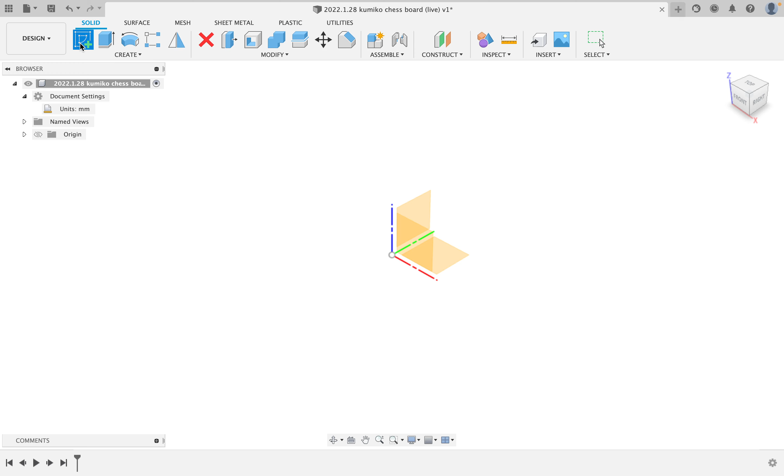So we're going to start by modeling. When it comes to something like a chessboard, it doesn't matter if you're modeling from the side or modeling from the top, but if you want to turn it into an actual cabinet at some point in time, it's probably best to model from the top because that's where you're going to be seeing the thing. So we're going to start by drawing a center point rectangle, and because a chessboard is square, we're going to make the two sides equal, and it is a center point square.

Now, we don't need to worry about how big this rectangle is. We're just going to draw another one for our dividing lines. Now you're going to think that we might need a horizontal one and a vertical one, and then we'll make them the same and all that. It's actually a little simpler than that. We're just going to click on our dimension tool here. Dimension this to be 2 millimeters. We're modeling in millimeters today.

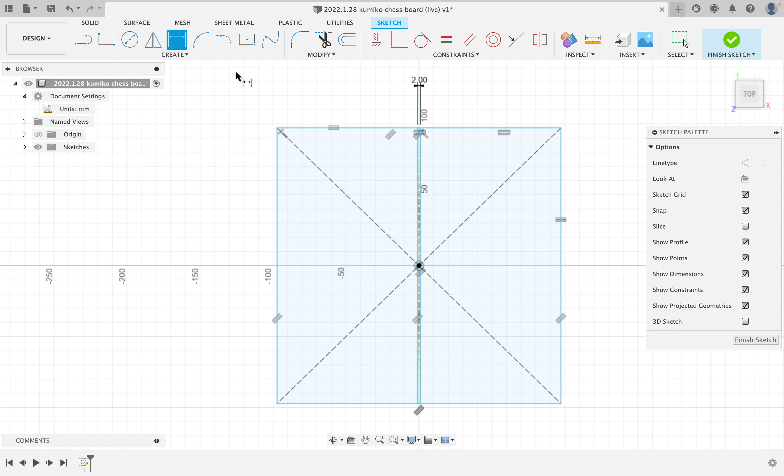I apologize to our American friends, but most of these we've done in inches, and Kumiko is a Japanese traditional art form, to a certain extent. Japan is a metric country and has been for a very long time, 100 years or so, give or take. And before that, it wasn't an imperial measurement system. It was a different traditional system, which Fusion 360 probably does not like very much. Not to mention, I don't think anybody in Japan is likely to be measuring these pieces in the traditional measuring system because it is a little awkward.

So we have this 2 millimeter piece here. What I am going to do with that 2 millimeter piece is I am going to flip it mirrored. So I will pick our 4 sides by double clicking on it. I will say that I want to mirror it across this 45-degree dividing line that comes with the center point rectangle. And I will say OK. And now we have a horizontal and vertical piece, and each of those is exactly the same.

Now, I want to take these two outside lines and create a rectangular pattern. We're going to move it left and right. We will make it symmetrical, and we're going to say that there are 82 millimeters between each of them. We want there to be a quantity of 9 because we need 8 spaces, and hit OK. Now I'm going to do the same thing, say repeat rectangular pattern. Don't need to worry about the fact that it's gone outside our grid. We are going to modify our grid in a second.

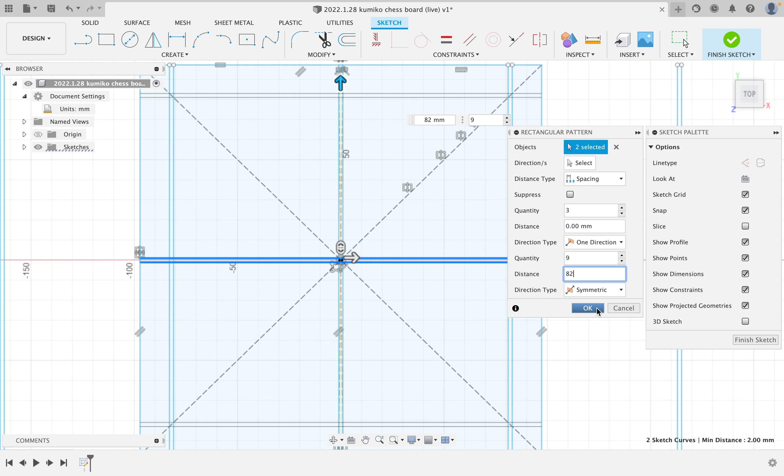Now I will select those 2 lines. I will move them up. We will change this to be 9 of them. They are going to be symmetrical, and again, they will be 82 millimeters apart. You can make that a variable and set that, but it doesn't really matter.

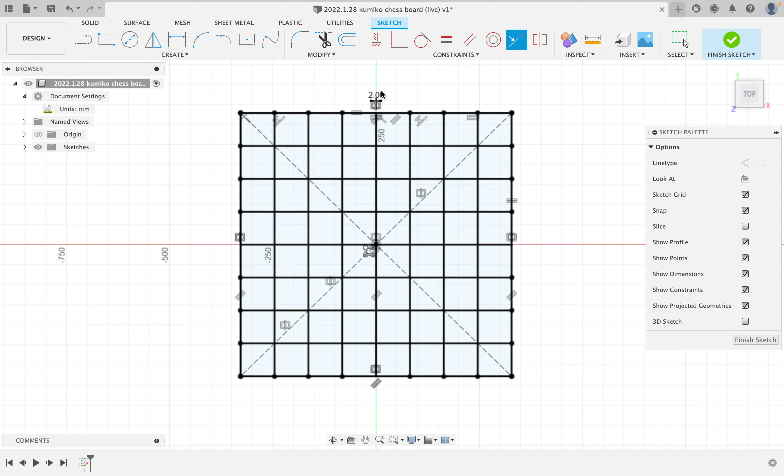And now the only thing that we want to do is we want to say that the outside line of our outermost piece is the same as the outside line of our square. And now you can see we have an 8 by 8 grid, and that will work out just fine. That's it. That's all we need, we give 1 dimension here and say finish sketch.

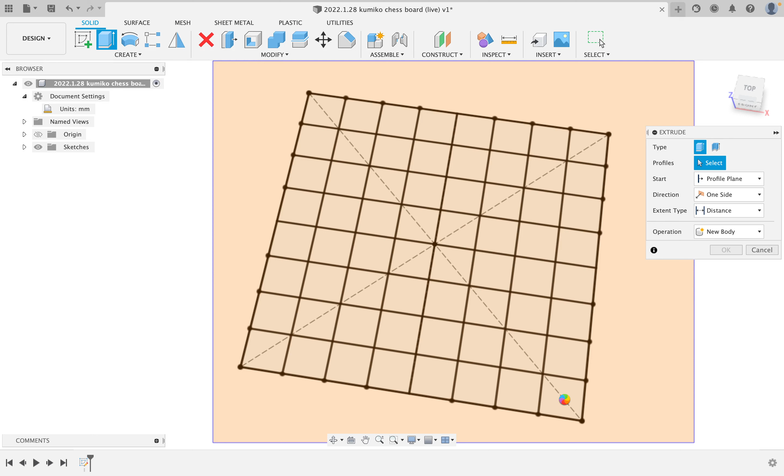All right, now we're going to take that and we're going to extrude it. You can hit E or click on this, you can hit extrude. I'm going to select the whole thing. There is, unfortunately, no easy way to select all the lines, but not all the squares. I wish there was. But it will only take me a minute to go in and do this.

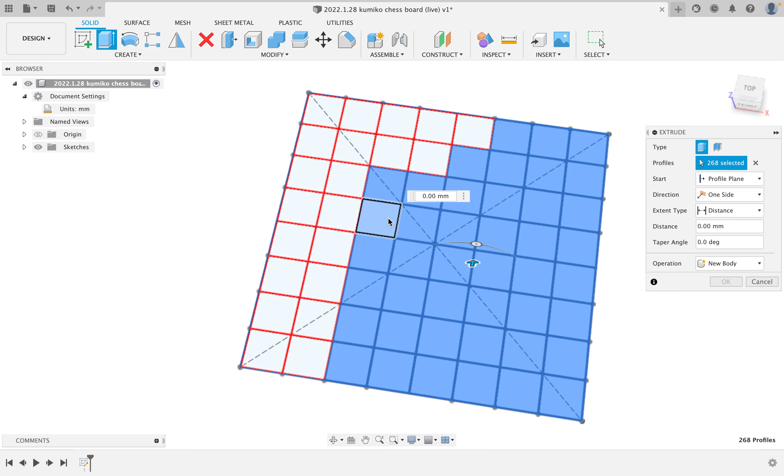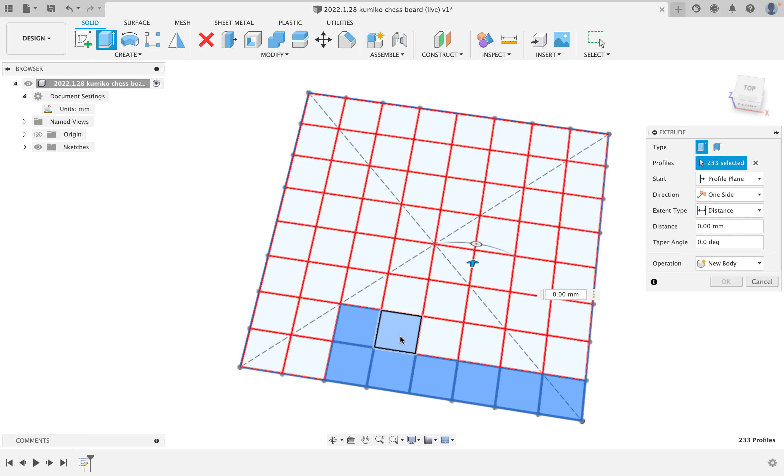Now, I could actually know the dimension on all these squares beforehand. And I could go through and make only one dividing line, copy the dividing line across the mirror face the way that I did in the sketch, and I wouldn't have to go through this particular step. The reason I choose to do it this way rather than modeling one piece and mirroring and copying that is that if I do that, I will have to go back and forth in time or know the dimension in advance. Practically speaking, you probably will know the dimension, but that isn't necessarily the case.

What I really want it to be based on is the dimension of these individual squares, that they're going to be 82 millimeters separated. If I want it to be based on that, and I don't want to have to do all the complex math that comes along with it, I can do this, and as you can see, it took me about 30 seconds.

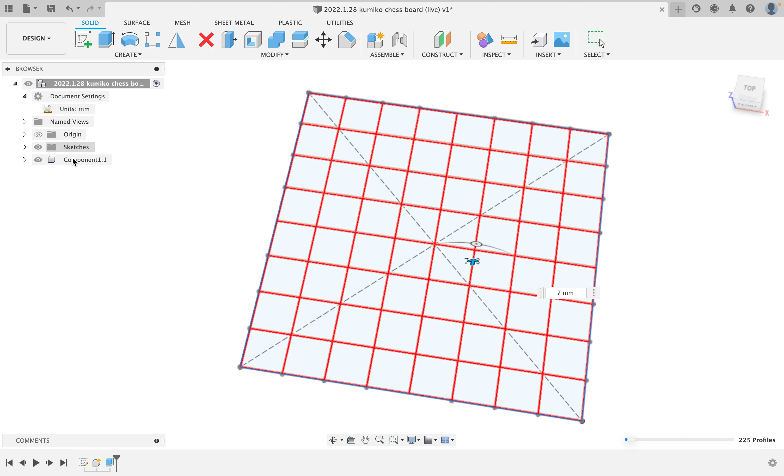So I'm going to make this 7 millimeters thick and say a new component. We're going to go over here and, double-clicking, we're going to call this new component grid.

My computer's being a bit slow today. It just did an update, and I don't think it likes it very much.

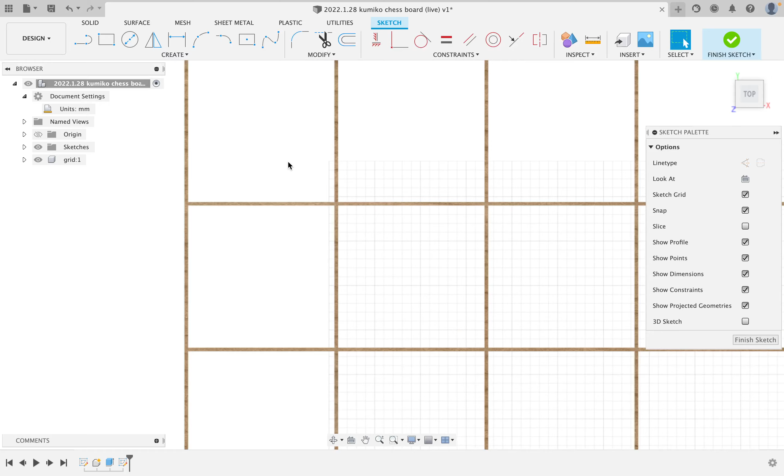So we have our grid. Now what I'm going to do is I'm going to create right away another sketch on that same plane. I'm going to go in here and I'm going to hit P for project. So I'm going to copy the dimensions. I will select our grid, and now I have all the individual intersection points from the grid, and that is great.

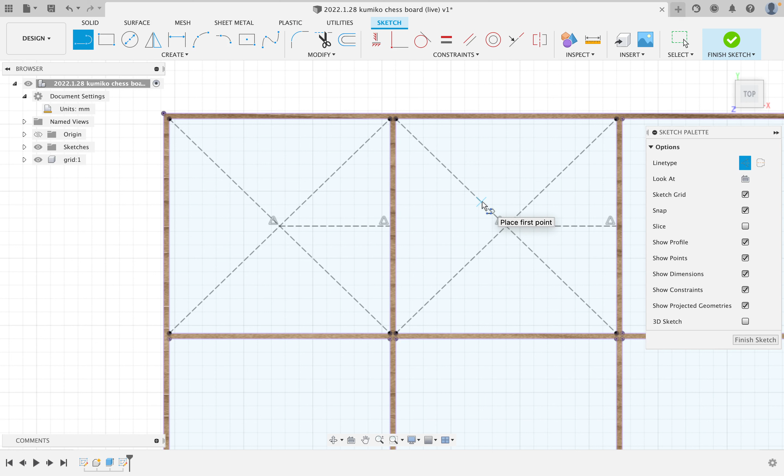So I will go to our line tool, hit X to make it a guide rather than a real line, and I will draw corner to corner and center to edge. So we have a nice center point, and we have mirrored dividing lines. And I'll do that in these top two squares. I won't do it for all the squares, because what I'm going to do is I'm going to create two Kumiko patterns. One for our dark squares and one for our light squares. They're not actually going to be light and dark in this model, but that's what we're going to be doing.

Now, I'm going to say I want a curve, and my curve is going to go from this line to this line. Seems all right. I'm going to make that curve there. Now you can see it's going right to the center of this piece here, and I'm going to give it a dimension. It is going to be 21 millimeters from that edge.

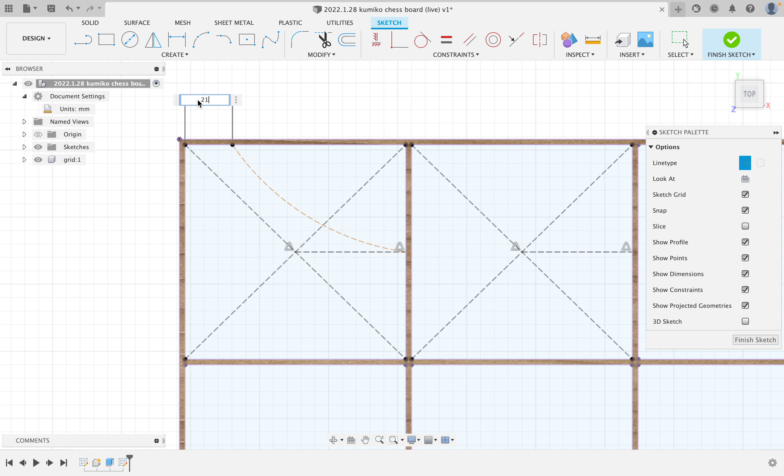The other thing I'm going to do is I'm going to give the curve itself a radius, and I will say it's 65 millimeters radius. Now keep that 65 in mind. It's not 65 degrees, it's that it is a 65 millimeter radius circle.

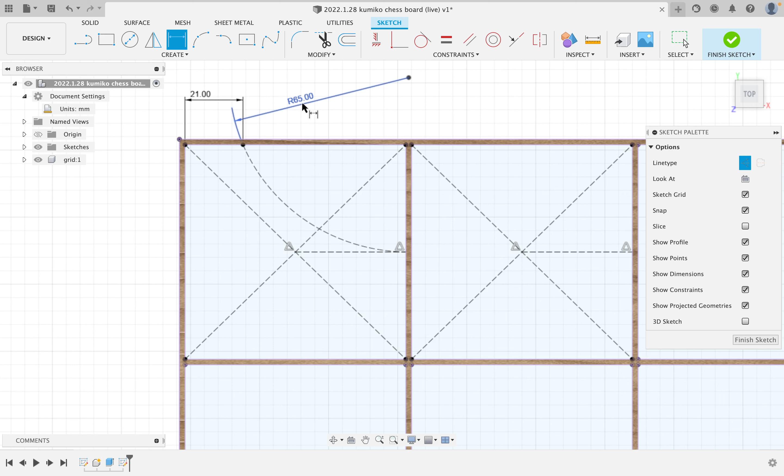The reason I want you to keep that in mind is because we're going to use that in both here, so we only have to be able to make pieces with one radius, and that will save quite a bit of time in construction. In the modeling, it doesn't really make any difference. I can just type in a new number. But if you're going to actually make a jig to make these round pieces, having them exactly the same radius will save you a lot of time in making them.

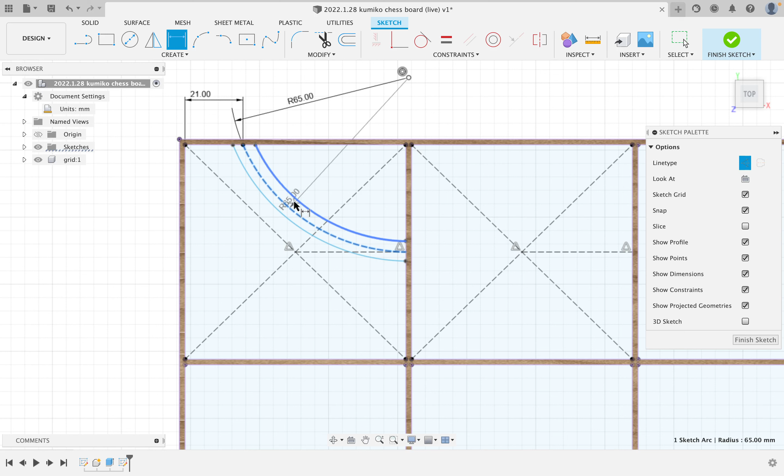Now, because Kumiko actually has a thickness, I'm going to draw two more curves. One curve and two curves. That curve, where it is, doesn't matter, and I will select both of them, hit X, and toggle them back to be regular. I will make them concentric by using our concentric constraint here. I'm going to take one and drag it back, and one and drag it a bit closer. And now I am going to give it a dimension between these two lines of 1 millimeter.

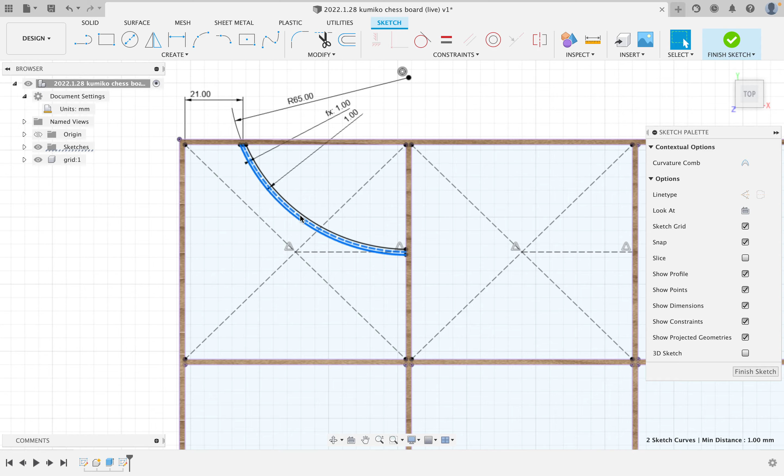I'm going to give the outside one the same dimension, but I'm just going to click on it here. Because if I click on it and I ever have to change one, I just change the first one. And we're going to be using this 1 millimeter dimension all the way through because all our Kumiko pieces are 2 millimeters thick. Now, I could draw that again, but what I'm really going to do is I will pick the two outside curves, 1 and 2. If you can't select something, just zoom in.

I will say circular pattern, and I will click on this center point. Now, I don't want 3 of them. That would be a neat effect, but I actually want 4 because we're going around in a square. You can scroll down or up and put that in, and that's pretty good. I think that looks like a great little pattern, but I want to make sure that it is distinctive from the other one we're going to create.

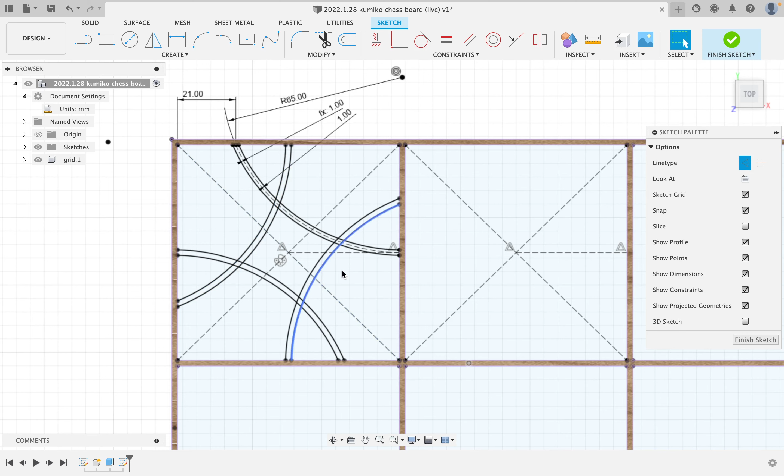The other one we're going to create has an outside set of curves and an inside set of curved squares. This one has an outside set of curved squares, and what we're going to do is we're going to make an inside circle. I will draw that. I will turn it into a regular line by hitting X, and I'm going to make it tangent to any of these. If you make it tangent to any of them, it will be tangent to all of them.

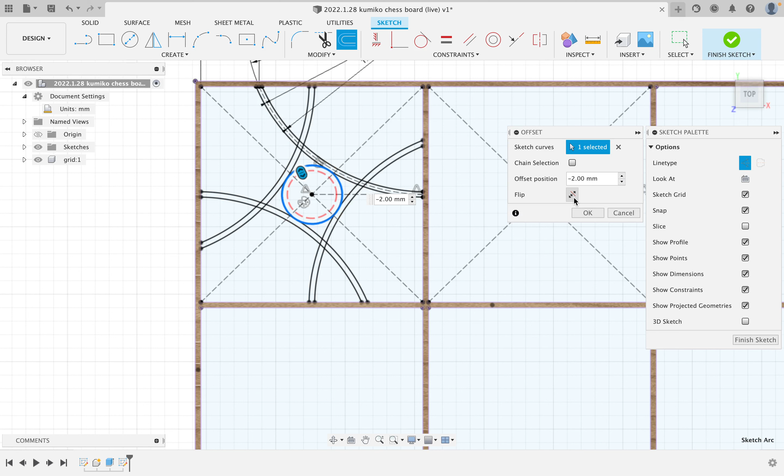I will click on it, say modify, offset, and make it 2 millimeters offset. Now you can see it's making it 2 millimeters offset to the outside. If we say flip, it will go to the inside, and again we click on it, hit X, and turn it into a real line. The reason we don't do that with these curves is that if you offset the one to the outside, it actually won't connect to the outside line, and you'll have to modify it later. So it's easier just to draw a few extra curves.

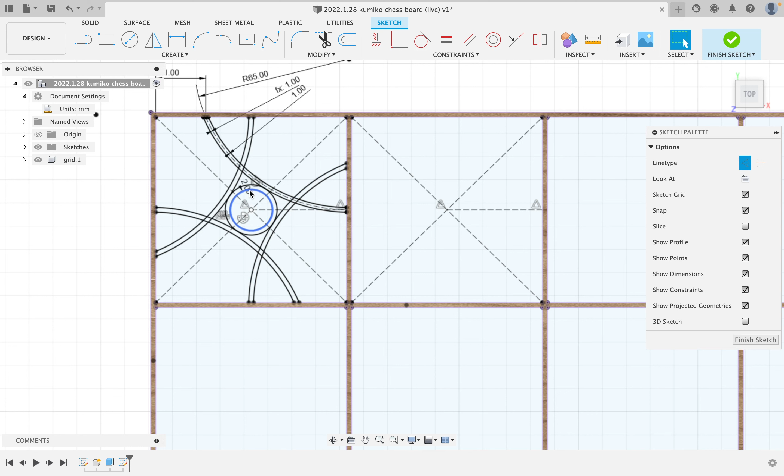All right, we're going to leave it at that. I could make this hugely more complicated, but I think that will do it for now. If you want to take that and make some more interesting lines in it, that would be fine too. I'm just going to drag this 2 millimeter number out here. You can always drag around your dimensions to make it so you can read them all, and I think that makes it a little easier to see if you ever wanted to create this again.

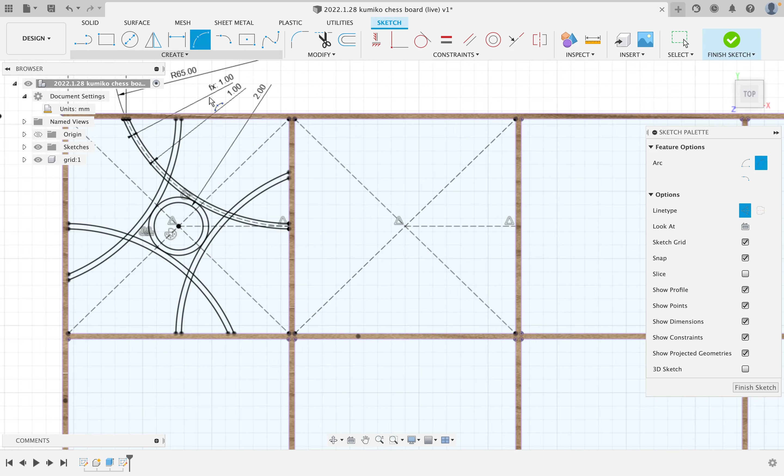We're going to go to this second one here, and we're going to start by drawing from this line out here to the center point of this edge. And we will draw that. This is again going to be a guide line. And we will hit that line, dimension, and we're going to make that dimension exactly the same as this 65 over here, and hit OK. Goes a bit out there, but we will drag it back in so we don't get confused.

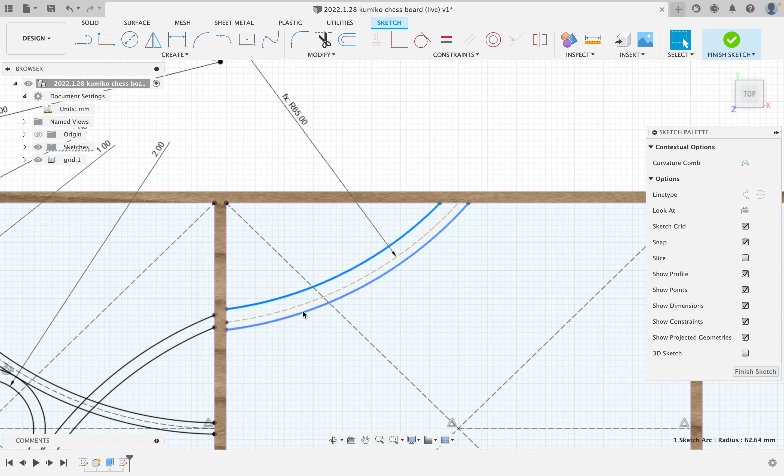And I will do exactly the same thing that we just did. I'm just going to turn off the guide drawing here. Draw from one side. Draw from the other side. And I will make those, again, concentric. One to this one, and to that one. I'll drag one of them back over here. It doesn't matter which one's inside and which one's outside because they're all concentric, which means they all follow the same curved path. Now, if I say dimension again, from the inside to the outside of that is 1 millimeter.

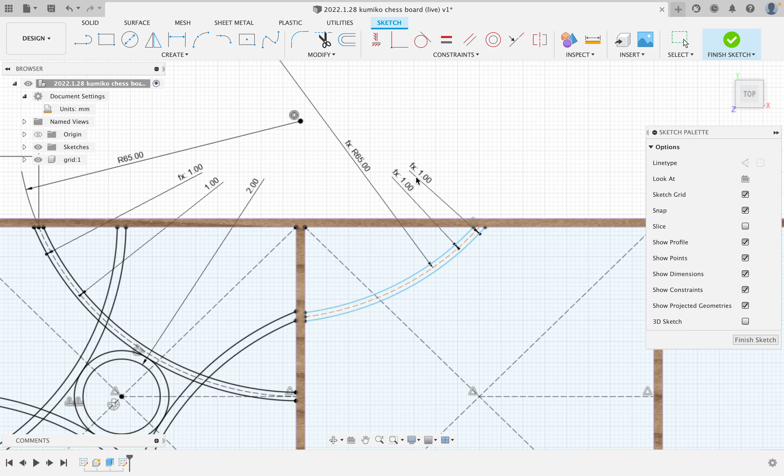So I will copy that 1 millimeter again, so I don't type it in. When in doubt, always try to copy the dimensions from somewhere else because you only ever want to have to modify something once. Say you wanted to change all the dimensions of this to be 3 millimeter Kumiko. Well, you'd only have to change this one to be 3 and this one to be 1.5, and all the rest would shift for you.

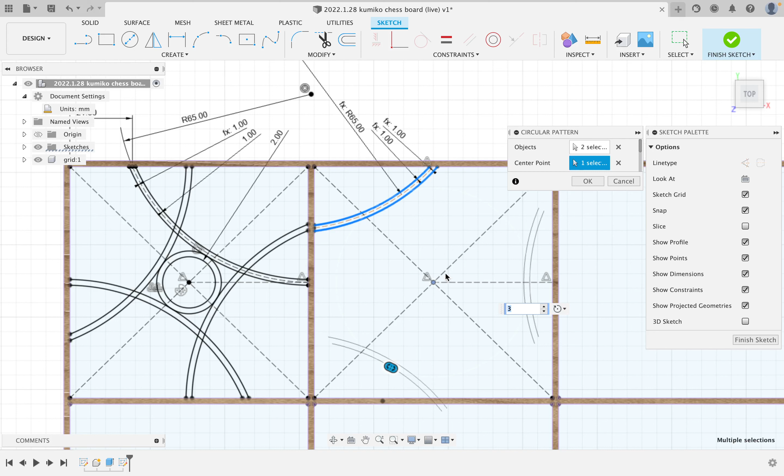Now, if I say create circular pattern, and I pick those two outside curves, I pick my center point, and I change it to be 4, so we have one for each corner. And I think we're doing pretty well on that.

Now, the only other thing that we want to do is we're going to create one more linking curve, and we are going to create that linking curve from the center point to the center point. What we're going to do with that is we will give it a dimension. We'll call it 40. It has moved over. Well, I don't really want to have to deal with it doing that.

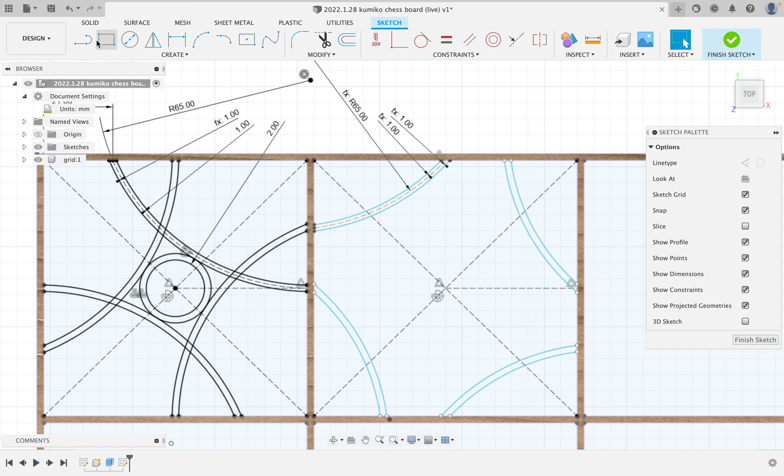What I'm going to do is I'm going to create some extra guide lines. Fusion has an odd time sometimes calculating center points. And rather than mess with its glitches, which it has far too many of for my liking, I'm actually just going to create guide lines. I'm going to draw from this center point to this center point, and I will drag it out so it is actually going to be tangent.

I'm just going to make sure it is tangent to both of these lines, which it is now by using this tangent here. You can always click constraints and pick it if you can't tell what it is from the symbol. It's particularly bad with this equal and parallel. Sometimes it's easy to get those two confused.

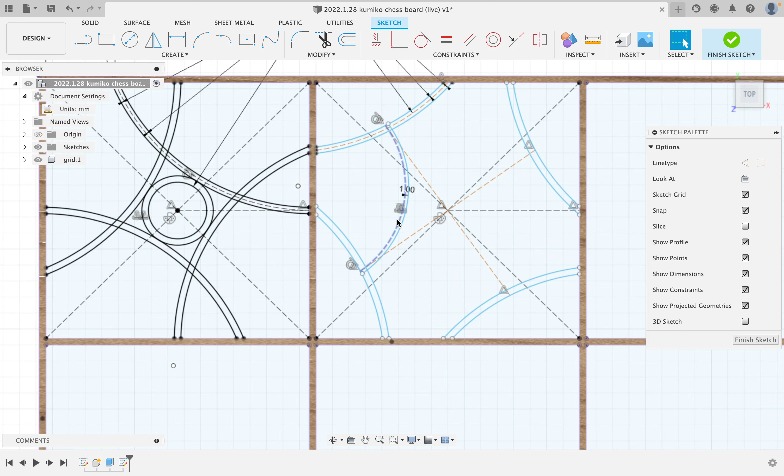All right, so I'm going to click on that one, and I am going to hit O for offset. I can also hit modify offset. And I'm going to create an offset that is 1 millimeter in this direction. And I'm going to do the same thing and say offset in the other direction.

The reason we can do that we couldn't do for these ones is that they're starting from well inside the line, and the fact that it is shifted slightly in both directions, as you can see, slightly above and slightly below because of the length, doesn't matter because they are going to overlap, and Fusion will give us the overlap rather than the total length.

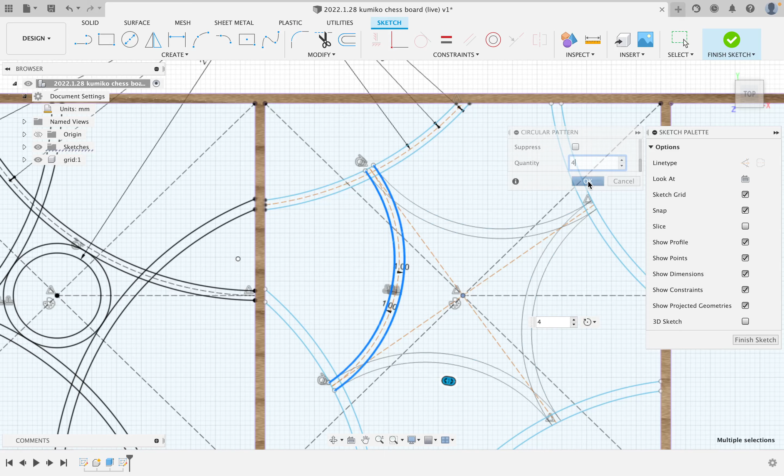I will select both sides and say circular pattern. We will rotate these around the center line, and again, we want 4 because we are making square grid Kumiko. That works quite well, I do believe. And that, I think, is pretty much everything we need for our piece here today. So we will say finish sketch.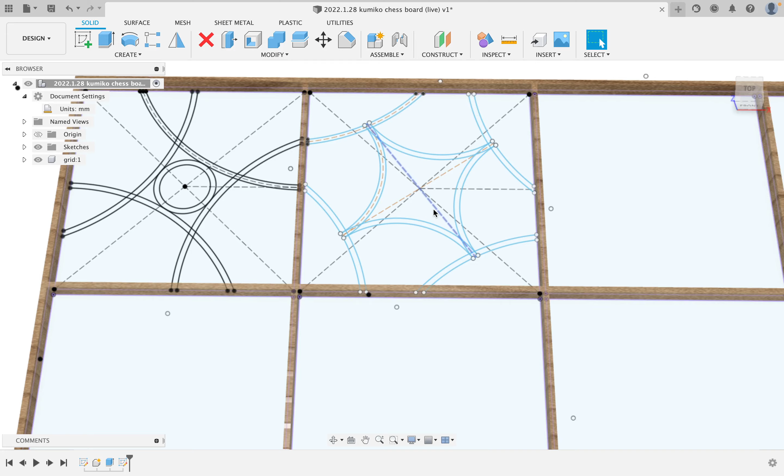I know it doesn't show them as being fully defined, and there is a reason for that, but I'm not particularly worried about it. When you are doing these infill pieces, as long as you get all the dimensions, the fact that Fusion doesn't know they are fully defined makes no difference at all.

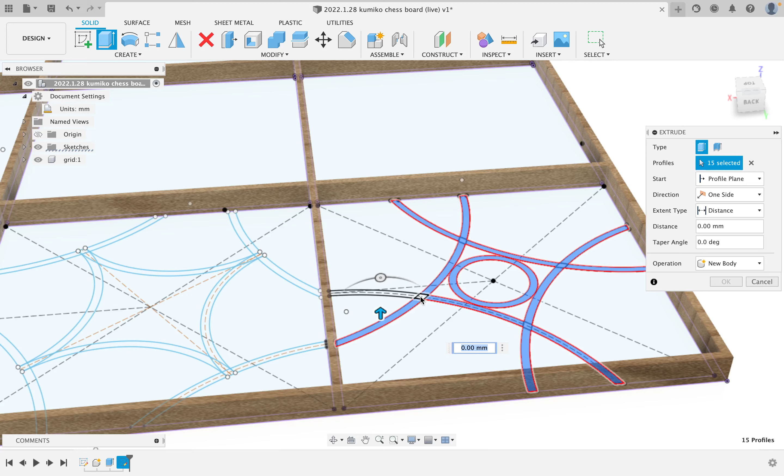So I could do each of these infill pieces individually, and if you want to do that, you can certainly go ahead. If you're going to be doing them all from the same wood, though, which we are today, you don't really need to worry about that. So I am going to select all these pieces of the first one, and I'm going to say new component. Instead of distance, we will say to object, and we will make them as thick as the grid.

And hit OK. Now, if I turn on that sketch again, sketch number 2, I'm going to call this infill. You can call it anything you want, of course. These names don't make any difference. We will say extrude. And we will pick all the pieces, again, of our infill for this. It is a little tedious sometimes, and my mouse work is not nearly as precise as it should be.

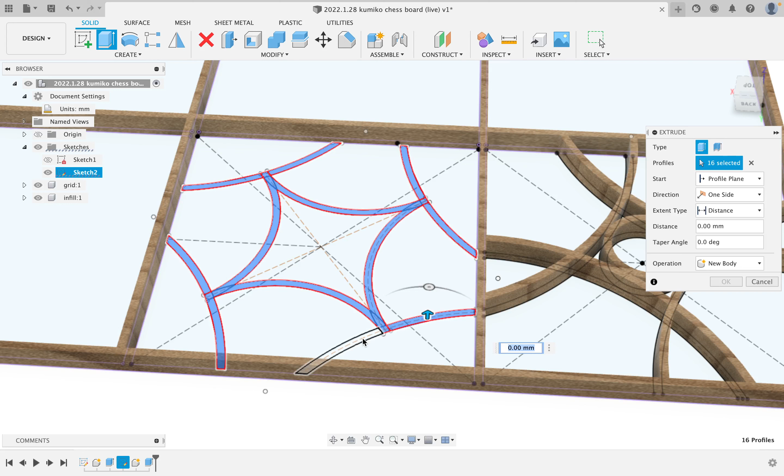All right, and we will say to object. We could have done both these at the same time, and that would have been fine as well. But we're going to say new body, and we're going to drag that body into our infill component. Remember, a component is more like a file folder, and the bodies are like sheets of paper.

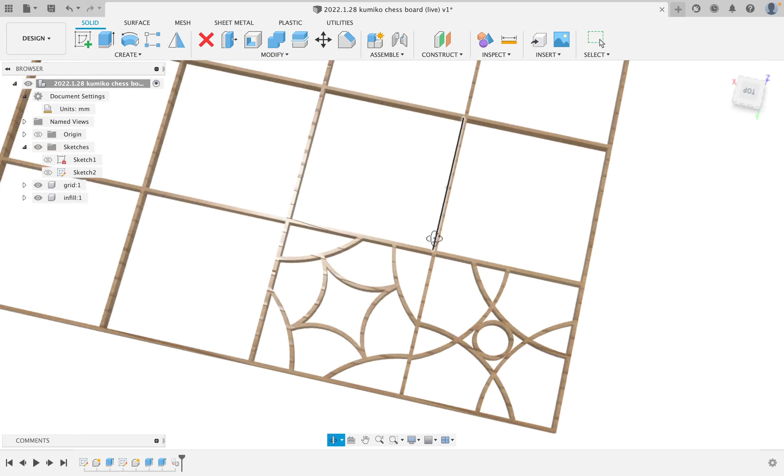So now you can see there is a distinct difference between one pattern and the other, but they actually link up in a sort of a manner. The angles are not right in terms of the linking, but I think that actually adds to the fact that you can see they are distinct rather than continued. So if I hit appearance, what we're going to do is we're just going to make these look somewhat different.

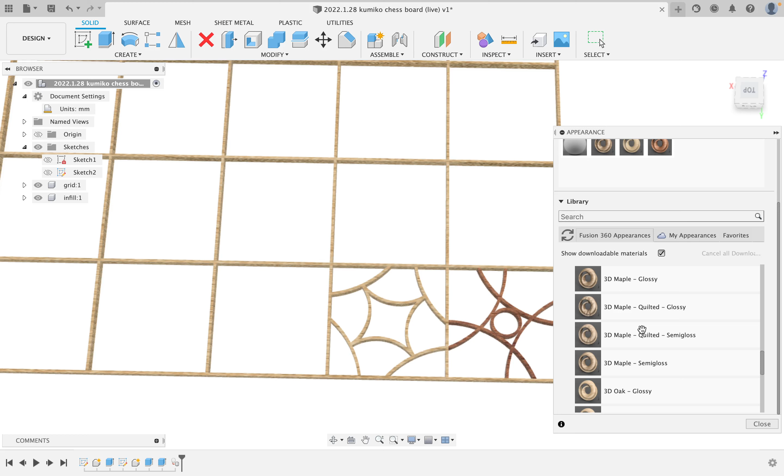If you were going to make this from actual wood, what I would suggest is that you use 2 different woods for these and another one for the outside pattern. What we're going to do is make the outside grid from ash. We're going to use cherry for one of these pieces, and walnut for the other. And I think that would give us quite a nice difference between which ones are going to be traditionally light and which ones traditionally dark.

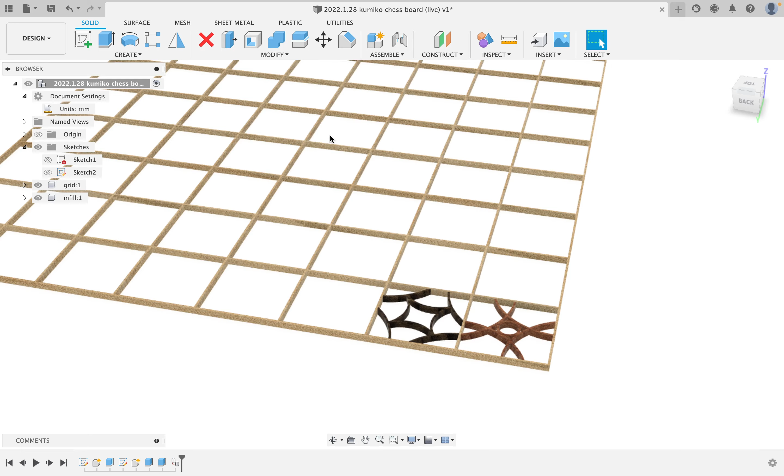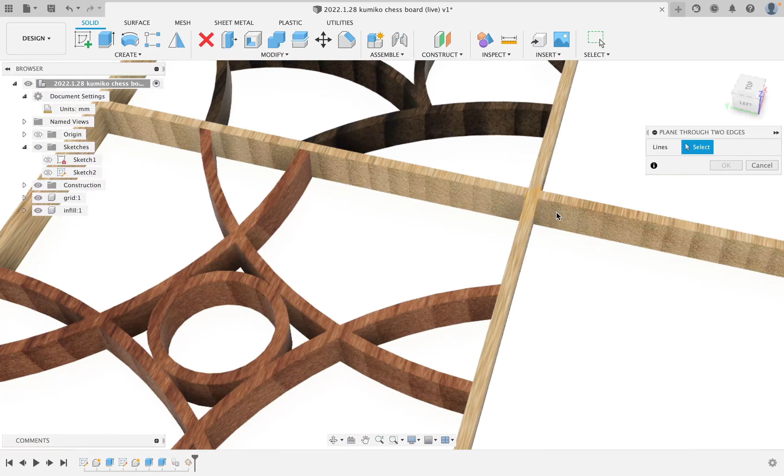If you did more infill in one and more in the other, it would be more obvious, but I think we are doing well keeping things quite simple today. So what I want to do is rotate these around a center the way that I did for the actual infill pieces, but we need to have a center. So I'm going to say construct a plane through 2 edges. I'm going to go through the 2 edges of this dividing piece. I'll repeat that and do it for the inside edges of the same corner.

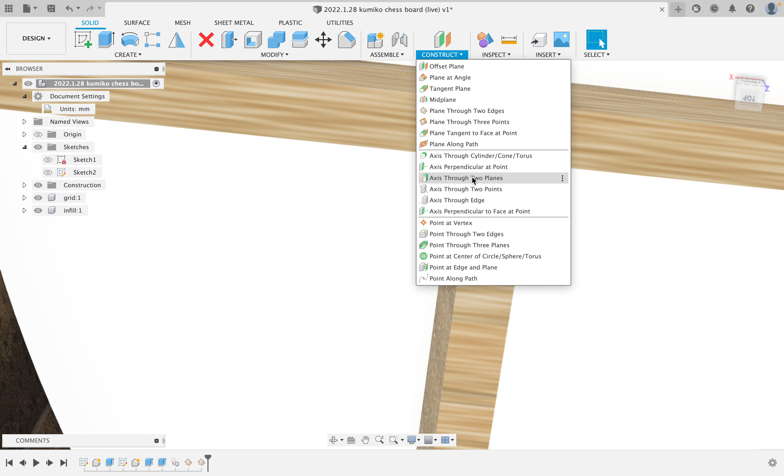So what we're doing is creating a center point to rotate things around. And if we zoom in, we can see that we have this center point, which is right between these 2 lines. Now to tell it that's a center point, I'm going to say an axis through 2 planes. All I need to do is pick those 2 planes, and now I have an axis. What direction it is doesn't matter because we're going to be using it as a rotation point.

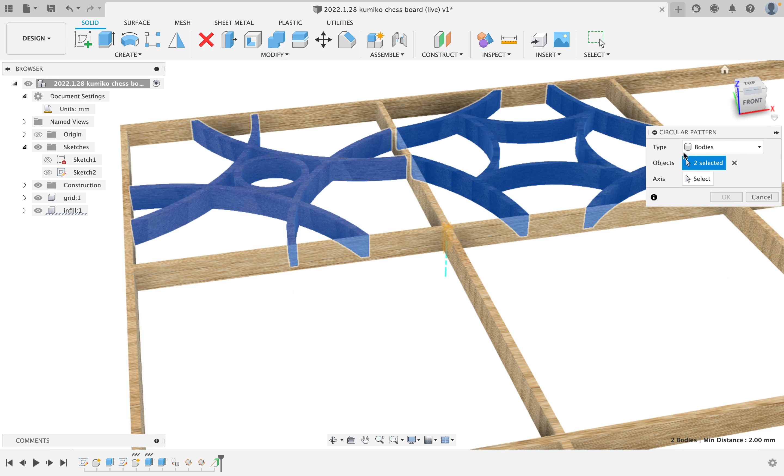And now I will say create pattern, circular pattern, and pick these 2 bodies. Make sure it is selecting bodies, not components or faces, or features for that matter, and I will pick this center line. Now it wants to do 3, but we actually just want 2, because I don't want to overlap them, I just want the same 2 spaced again. Now we're definitely starting to get somewhere.

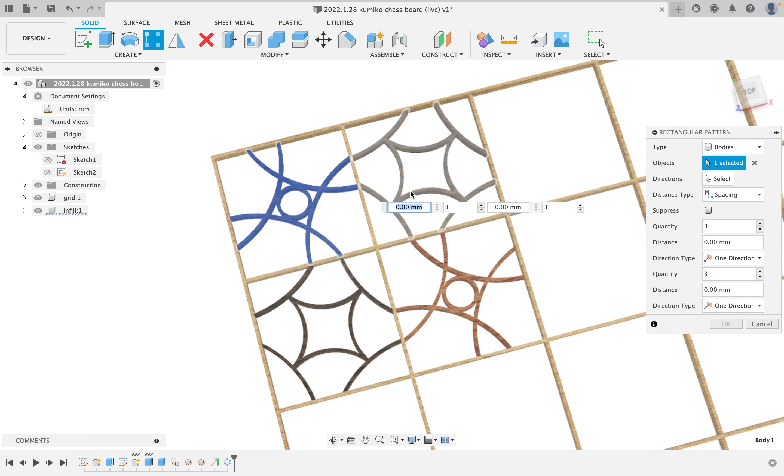If I say create pattern, rectangular pattern, and pick all 4 of these, all I need to do is select my directions. If I select a direction on this plane and I drag them over, I want 4 of those. And given that we were doing 82 mm spacing for our grid, we want to have one every 2 grid spaces, which will be 164 millimeters.

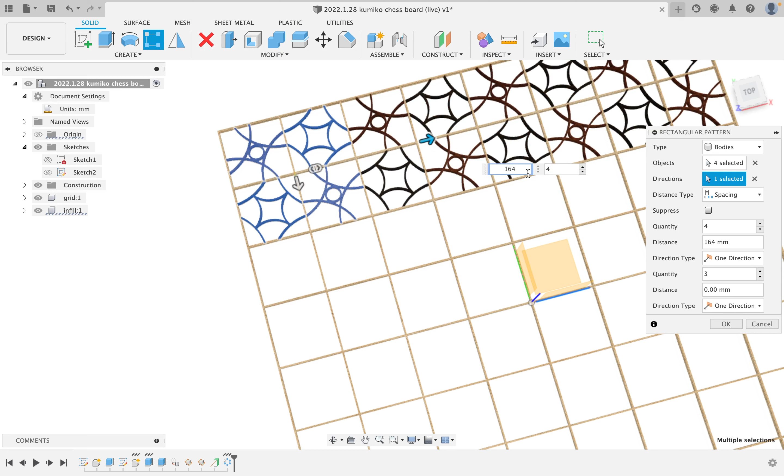We're going to drag the other one down, do the same thing, and you can type it in over here, 164 millimeters. And you can see they all now line up. So I will say OK. And we now have a chessboard pattern of alternating Kumiko squares. Now, if you want to do this with the hemp leaf or the traditional cherry blossom pattern, that's totally fine. You could have hemp leaf, cherry, and it would be just the same procedure.

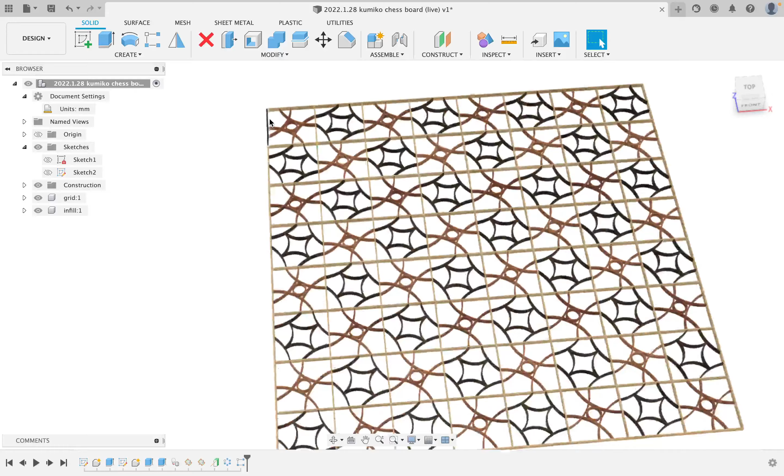I'm doing it with this because it gives me an opportunity to share 2 other Kumiko patterns. I have already done videos on some of the traditional ones for this series, like the hemp leaf, so you already know how to model that. Now you know how to model this one, which I call the inset ring, and this one here I call the stoned eye. There are other names you can put on them. They are not traditional, so there are no traditional names. I don't really think the traditional names matter too much, but I do like the fact that one is called hemp, one is called plum, one is called cherry. You can definitely see the shapes in those.

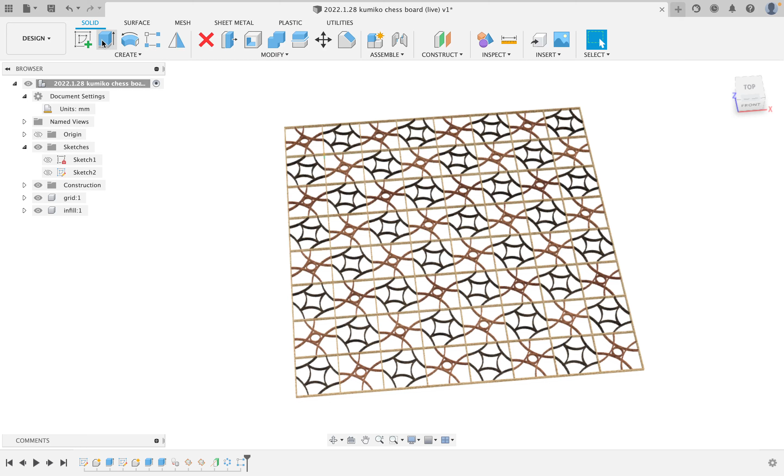So what we have here is a chessboard, but you can't play chess on it. There's 2 reasons you can't play chess on it. One is you need the rest of the board. You need the surface, because if you put pieces on this, they'll just fall right through because these are actually empty space. The second is we don't have any chess pieces. We're going to fix one of those in this video, and we're going to come back to this series in a little while, and I'm going to fix the other one. The first one that we're going to fix today is that we're going to create a surface.

So what I'm going to do is model yet again on that same plane, and I am going to hit P for project, but instead of projecting all the geometry, I'm just going to project these outside lines.

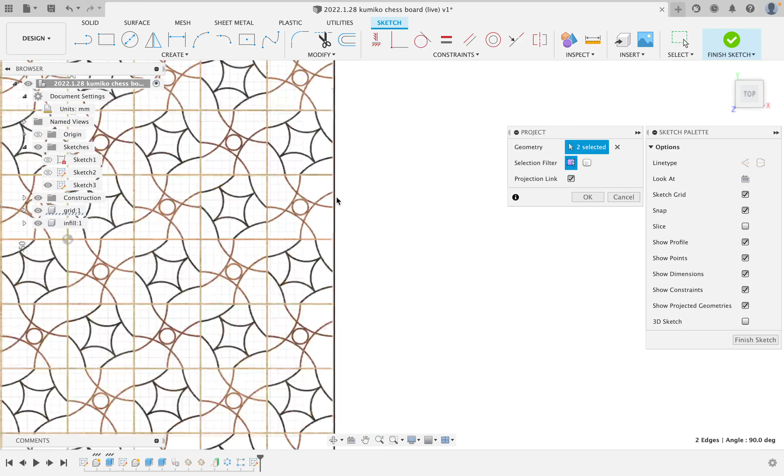Have to scroll in a little to pick it, scroll out, move down, and I'm going to pick this outside line too. So now I have those 4 outside lines. That is the boundary box for the outside of our grid.

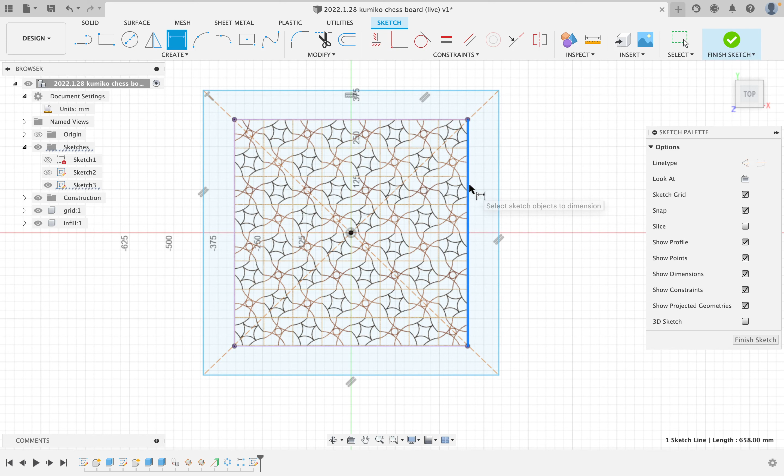What I'll do is I'll create a center point rectangle and go out, and we're going to create a 60 millimeter border all the way around, 60 millimeters. And I will say that the outsides are equal and it is a square. We just need one more thing here.

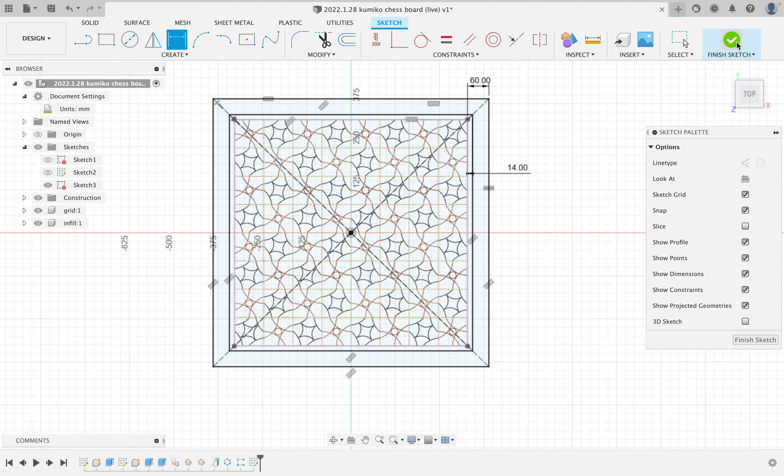I want to have a piece that is inset, so I will create center point rectangle, which is a center point square because I have put it on this dividing line here. And I'm going to say that the spacing from the outside of that to the inside is going to be 14 millimeters. I will say finish sketch,

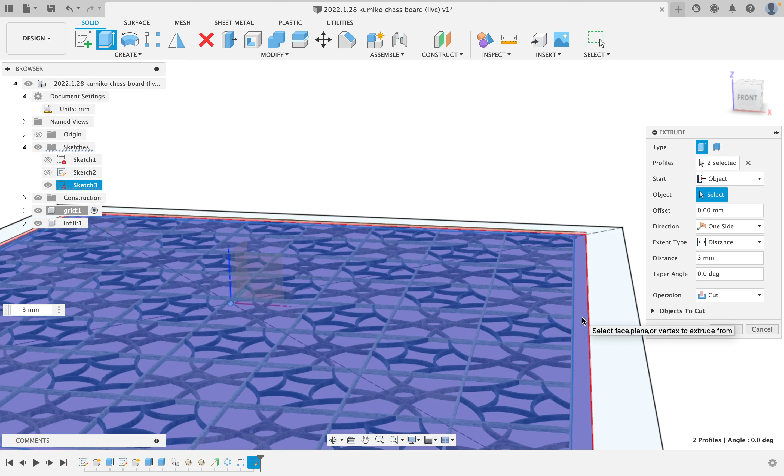and I am going to pick that rectangle plus the smaller of the outside ones. I'm going to say this is going to be 3 millimeters thick, and we are going to zoom in. Now, instead of starting from the profile plane, I'm going to select from an object, which is the top of our Kumiko pieces. I just need to scroll in so I can pick it. Not sure why it is not letting me pick this piece. There we go.

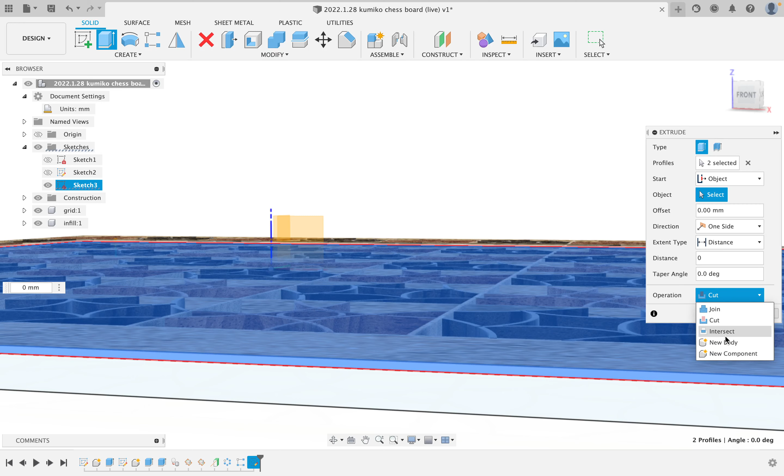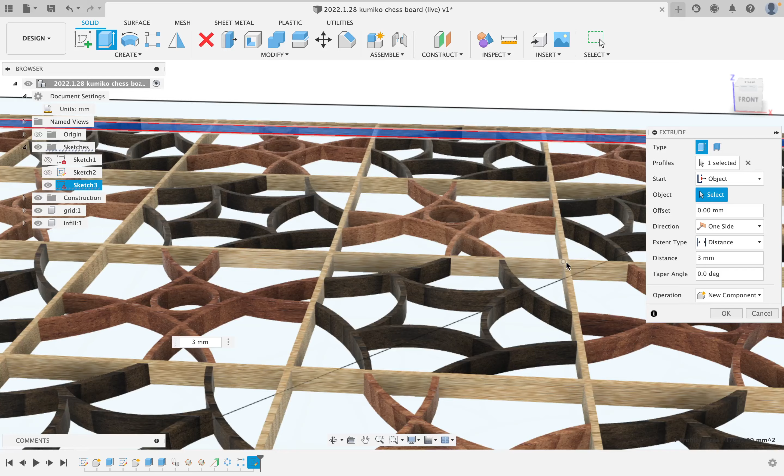Let's just get rid of this dimension for the moment. Say new component. We'll scroll up. It's still getting in the way. So I am going to pick this outside piece. I am going to say 3 millimeters. New component. From the object, and I will scroll in and I will pick this top piece, which it is being really twitchy about letting me pick. I'll scroll way in and pick that top piece.

So now we're going to be going 3 millimeters up from that top edge. And I am going to go up here and select both the outside and the inside, and it will now let me do that. And you can see it's actually covering the top piece here. Is it covering? Yes, it is covering that top piece. It's sitting right on top. Now, what do I actually want to do with that?

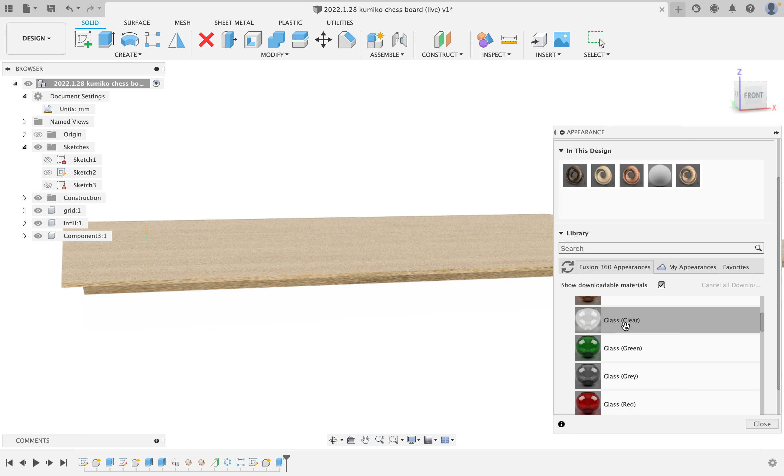I'll go back to appearance, and instead of making that from wood, I'm going to make that from glass. Smooth glass, and we're going to say it is clear. I'll just drag it right onto that component and hit OK or close. I'm going to say that's the glass top. That's pretty good. I think that worked out quite well.

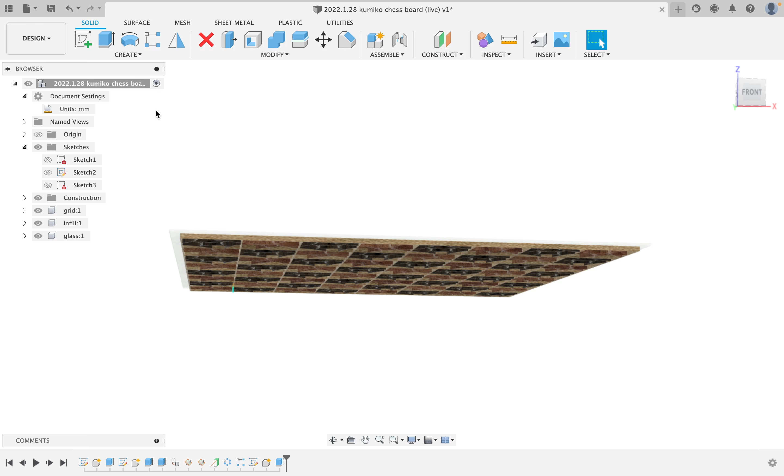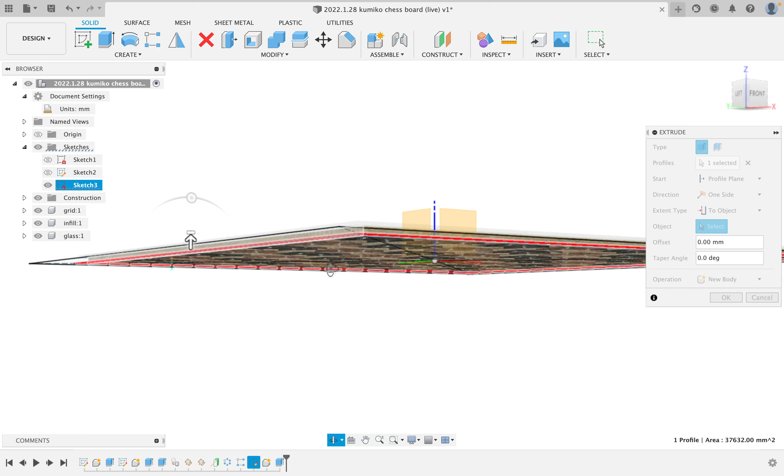Now, the other thing that I want to do is I want to create a little filler ring. So I will hit this sketch, make it appear again, and I am going to select just that outside rectangle, which we are going to bond on. We will say distance to object. We will go up and pick our object. I'll turn the sketch off to make it easier. We're going to pick the bottom edge of our glass piece.

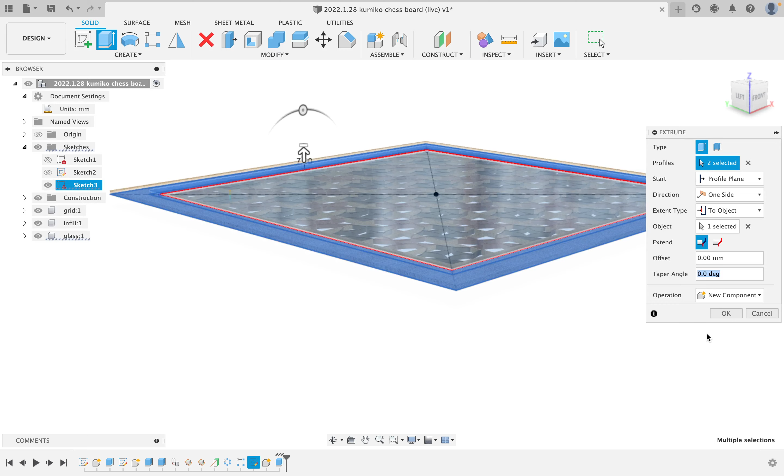And we will say new component again. I'll turn the sketch back on. And I will select both the outside pieces. And we are going to say two sides. Now, the depth that we are going to have for the second side, we are going to make it 8 millimeters. And say OK. So what we have now done is we have cut this wooden piece all the way up through. But did I pick the bottom edge?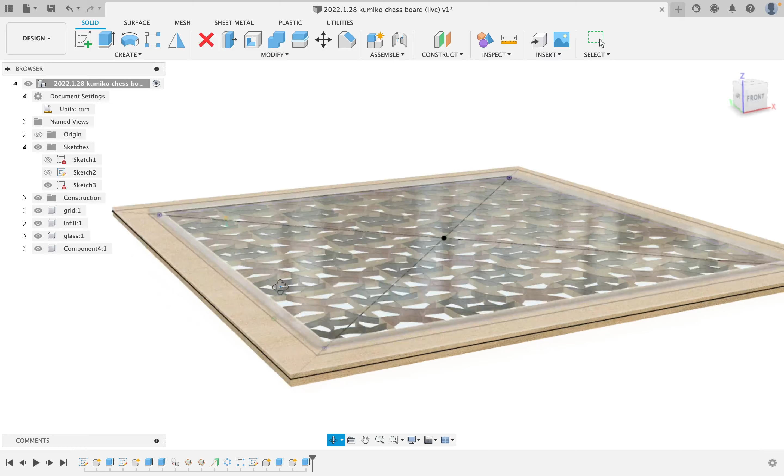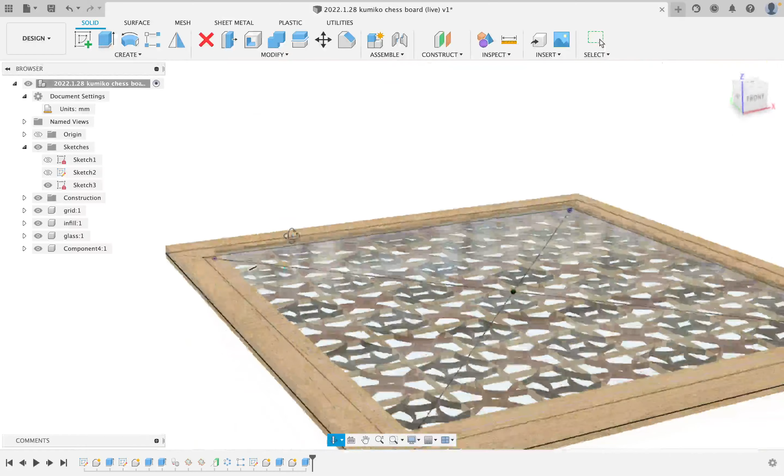Oops, my bad. What I actually want to do is pick the top edge to object 1. We will pick the top edge of that glass piece. And we're going to go beyond the top edge of the glass piece 3 millimeters. And hit OK. So what we've actually done is we've gone right through our glass piece. We've covered it over, which is a little problem if you're making it from glass, because the glass isn't going to like that. But we're going to hit Combine.

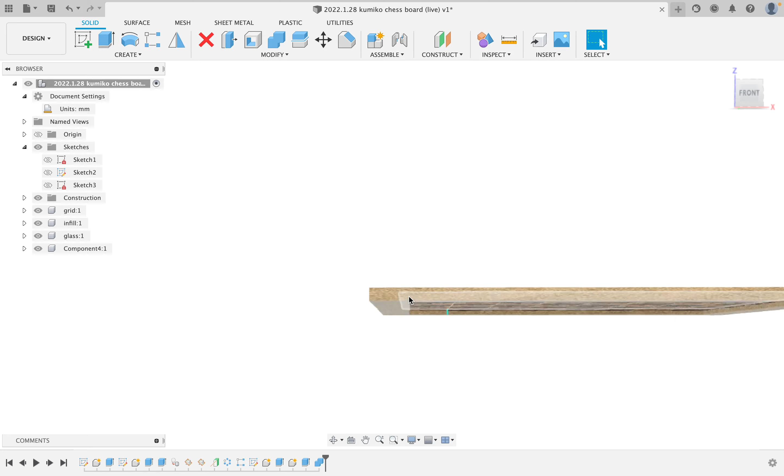We're going to cut out this outside piece with the glass and hit OK. And now what we actually have is a little rabbet, or a little groove in this case, right through. Now, it doesn't fill all the way to the bottom, but we're going to fix that now by hitting our extrude function. We're going to select that glass, and we're going to cut right through to the bottom.

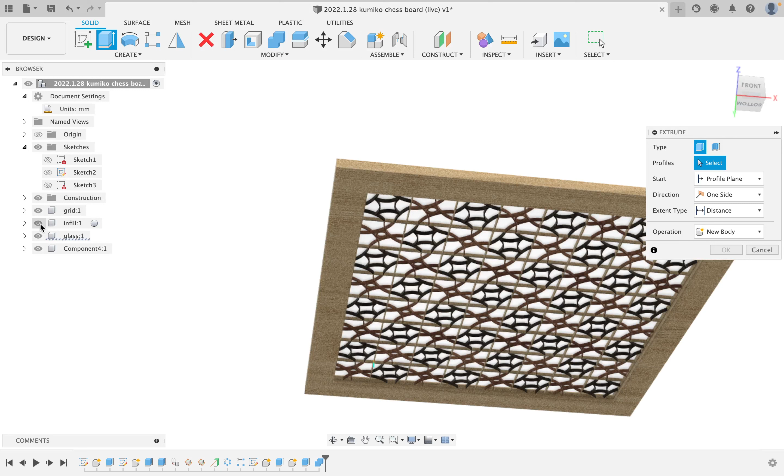Did I select the wrong piece? Yes, I did. All right, so I will turn off the infill. I will turn off this component. I will turn off the grid, and I will pick the inside edge. We're going to go all the way down here. We'll turn back on our component 4.

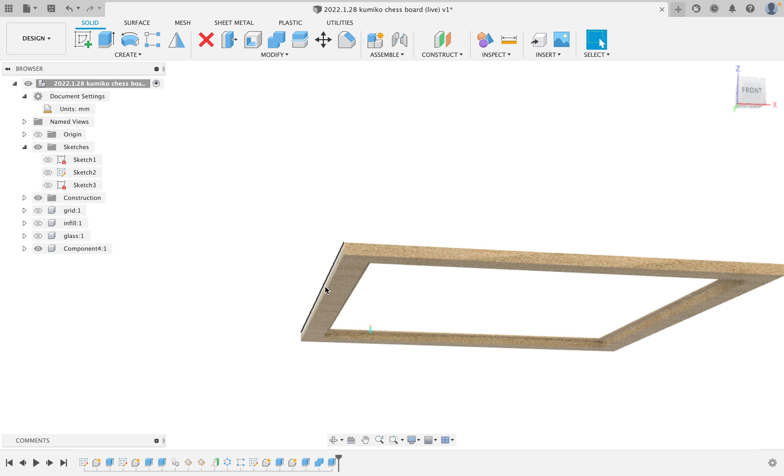And we are going to say cut. As you can see now, we have cut a rabbet for our glass piece and our Kumiko. Turn the glass on, turn the infill on, turn the grid on, and now we have that piece. So our glass is sitting inside. The only thing that I want to do now beyond that is to put a filler piece in the bottom.

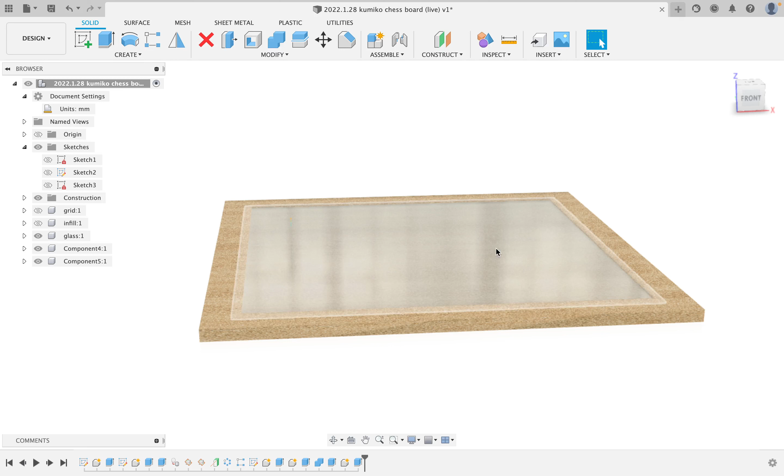So I'll turn off the grid and the infill again. I will select the bottom of the glass. We're going to go right to the object that is on the bottom, and we will say New Component, and say OK. So now I have below the glass, you can see it, under the glass, I have this filler piece, which is great. I will edit that feature and make sure that we are going offset 7 millimeters to leave some space between the glass and the infill.

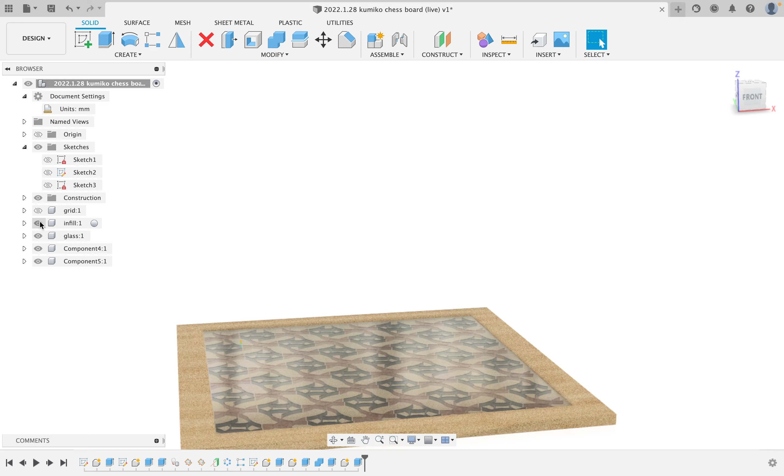So if you turn the infill on, turn the grid on, what we have now is that there is the infill and the grid between the glass and that back filler. If I say A for appearance, again, what I need to do is go in and find the fabric, the white fabric, and I will change the backing of that piece to white. That doesn't look very white. Let's see, do we have a white cloth in here? Let's say use this black fabric. I will edit it.

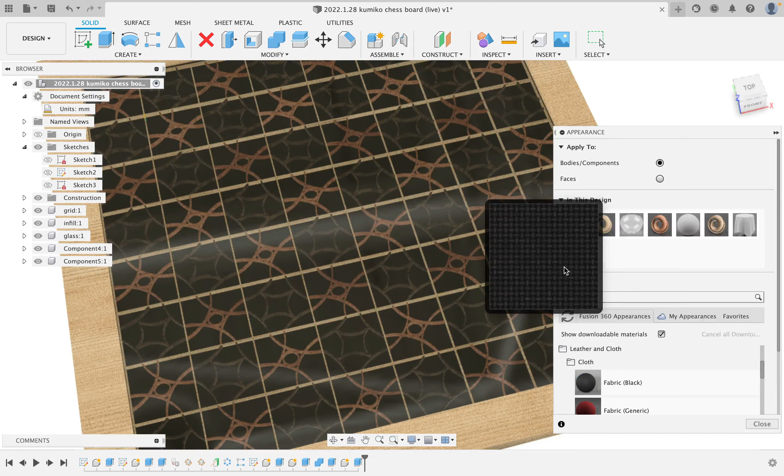And I don't know, is it going to allow me to use white? No. Oh, there really needs to be a better fabric for this. We'll just say white fabric for the moment. I wonder if there's something else. Miscellaneous. White paper. That should be a bit brighter.

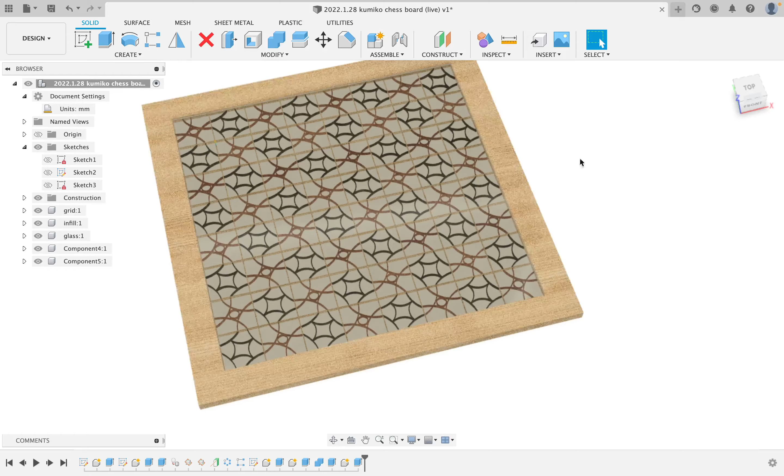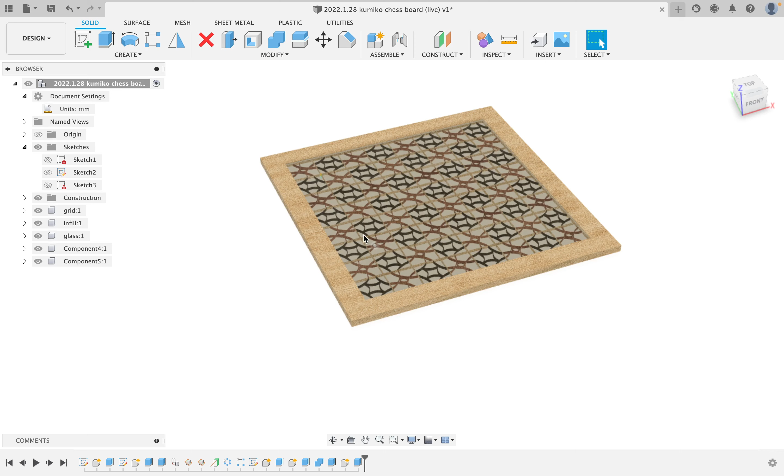Anything that you're going to put behind your Kumiko should, if the Kumiko pieces are very dark, like this, be quite light, and if the Kumiko pieces are very light, it should probably be quite dark. We're using this ash border to offset all these dark pieces. If you were going to make them light, I'd probably use a dark border like walnut or maybe a stain. Maybe if I was going to do that, I would actually use something like Padauk or Wenge or even ebony. Well, that's a lot of ebony, but I think you get the idea.

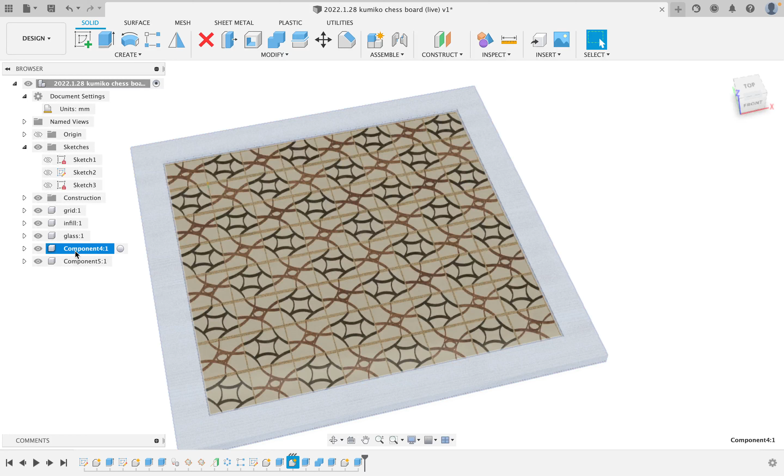Anyway, that is our board, our chessboard, with the inlaid Kumiko. And next time, what we're actually going to do is draw some chess pieces, some modern chess pieces that are loosely based on Kumiko grid patterns. We'll just give these some names. This is going to be our frame, and this is going to be our backer.

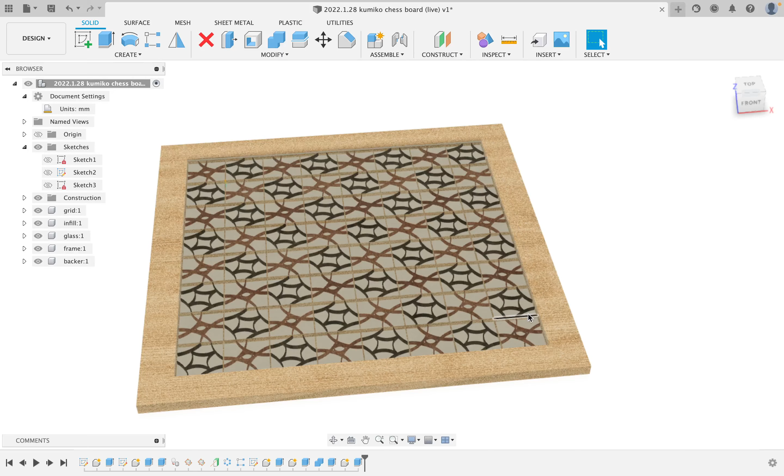We've actually made this whole thing from this paper texture. You could make it from any texture you want, and you can actually change it, of course, if you were making it in real life, to have just one face that was something and have wood on the bottom. You could put fabric in here, which is probably what I would actually do, or you could put plastic behind it, and that would give you a nice shiny perspective. One thing that I have done for chessboards in the past, though not an inlaid chessboard like this, but it would work, is to put a mirror behind it, and that would give a really nice effect too.